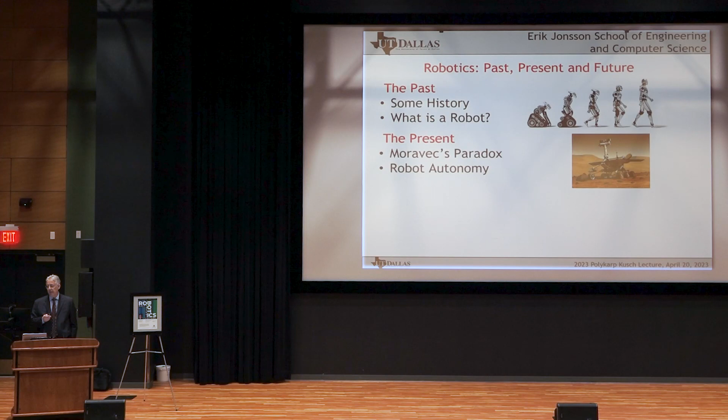And then I want to talk about something that's called Moravec's paradox. And if there's one takeaway from this talk, it should be that whenever you hear about artificial intelligence and robotics doing our day-to-day tasks, think in terms of what Moravec's paradox has to say about that, and we'll get to that. Then I'll talk about autonomy, the holy grail of robotics. What does it mean for a robot to be autonomous? I'll give you a few examples. And in the future, I'm going to talk about a couple of specific areas that I think are important: humanoid robots, networked robots, human-robot interaction, which is extremely important these days, and telepresence. So that's kind of where we're headed.

Now, the history of robotics, of course, goes back even pre-classical, before even the Egyptians, the Greeks. People were interested in building artificial humans, animals, and so on. We don't have time to talk about any of that, but there is a long history of mechanical animals, dolls, and what were called at that time automata. Prior to the 20th century, things like a mechanical horse, steam-powered mechanical man, lots of dolls, and so on.

I'm not going to go farther back than that, but there's an interesting example of the golem, which in Jewish folklore is an animated humanoid. Certain rabbis had the power to create golems out of clay and bring them to life, and the golem is actually mentioned in the book of Psalms in the Bible. The most famous golem legend is probably that of Rabbi Loew of Prague, who created a golem in the 16th century to protect the Jews of Prague. In some accounts, the golem eventually went on a murderous rampage, killing the Jews. So it seems that golems, once created, are difficult to control.

That influence of the golem is actually seen in many stories, like The Sorcerer's Apprentice, Frankenstein, and a number of others. It speaks to a somewhat distrust in Western culture of science in general, and the idea that you create something, like in The Sorcerer's Apprentice, and something goes wrong.

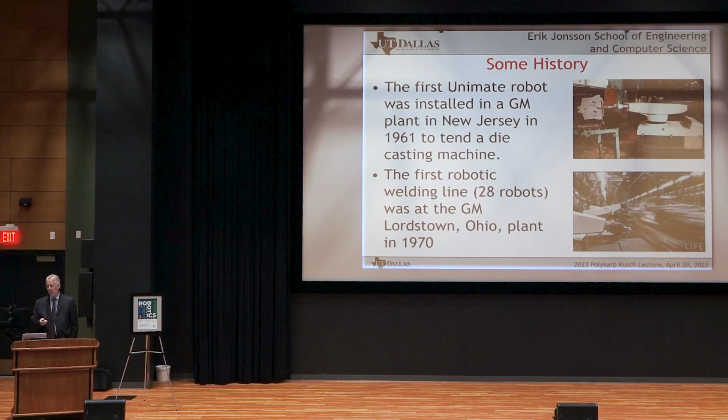Okay, that's all the time we have for history.

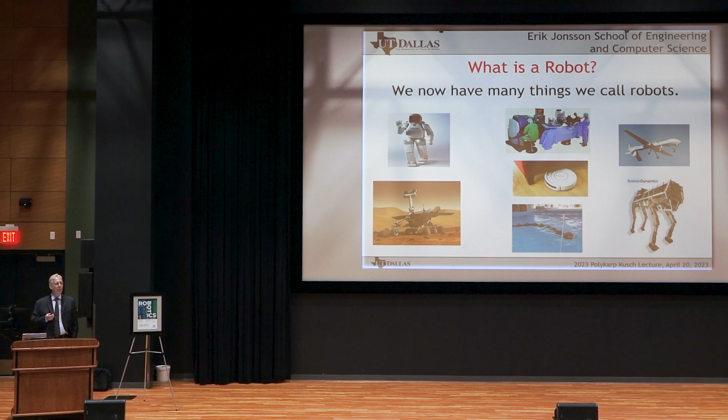We now have many things besides manipulator arms that we call robots. So if I would ask you to define a robot, how would you define it? We have many things we call robots: humanoids, robot surgery systems, drones, vacuum cleaners, Mars rovers, and so on. In fact, the term robot has become quite overused.

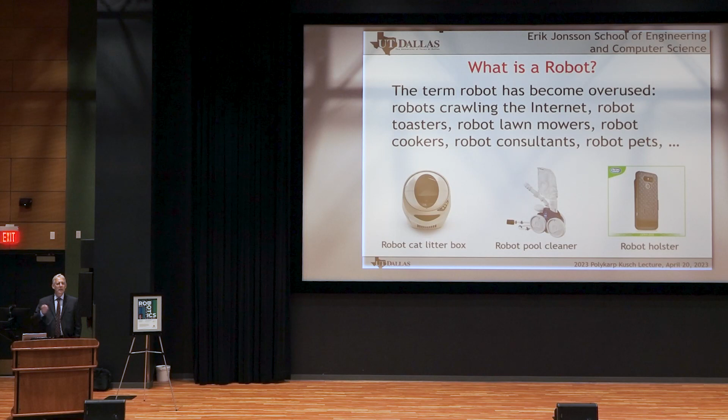How many of you go to a website and have to check a box, 'I am not a robot,' before you can proceed? We have robots crawling the internet, robot toasters, robot lawnmowers. You can go to Amazon and find a robot cat litter box, or a robot holster, which is something you clip to your belt to hold your iPhone. So the term has become somewhat meaningless. Companies figured out that instead of selling a crock pot, if they call it a robot crock pot, they can increase their market share.

But if you go to the robotics research community, there's a popular definition that a robot is a machine that transforms sensing into action. Here we have the environment; the robot has some sensors to collect data and sense the environment, some computation to analyze the data, and it computes commands to give to the actuators to act back on the environment to do some work.

In the field of control, if you ask what is a control system, this idea of sensing into action is actually the central concept in feedback control. So it's hard to distinguish these two definitions of a robot: a machine transforming sensing into action, and a feedback control system, which also transforms sensing into action. For me, without feedback control, there's no robot. And action essentially means manipulation or locomotion.

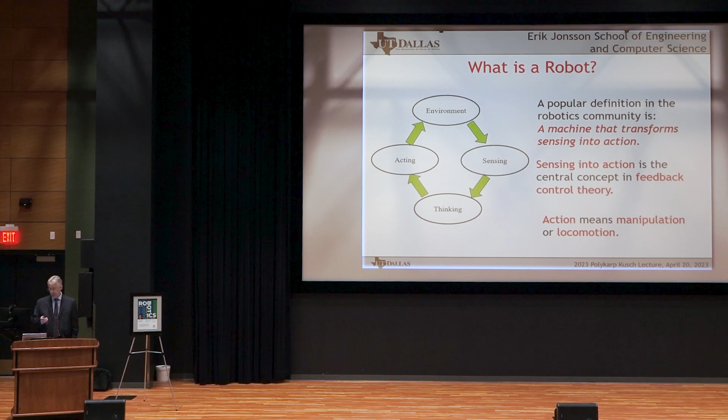Manipulating objects, moving around from place to place, and so on. My definition of a robot, modified a little bit, is a machine that transforms sensing into action through feedback control, capable of manipulation or locomotion. We'll see some examples of these two.

Manipulation is really the harder of the two tasks. Because for locomotion, we have wheeled vehicles, and there have been great strides made—no pun intended—in walking robots with bipeds, quadrupeds, and so on. We still have a long way to go to build robots that are capable of really good manipulation.

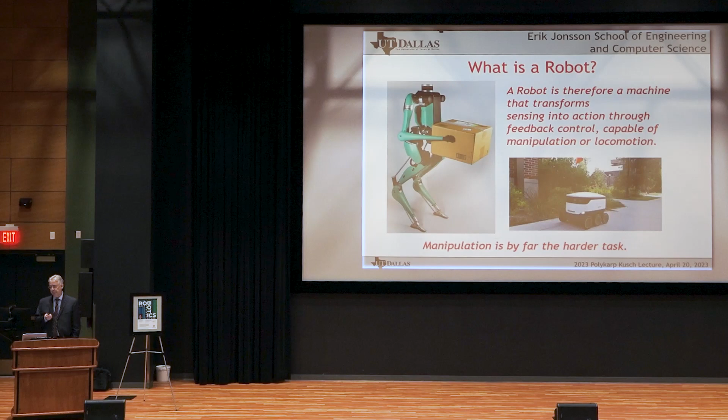Well, that leads into what's called Moravec's paradox. The way it's stated is that low-level sensory motor control tasks require enormously more computational resources than high-level reasoning. Well, what does that mean?

Since we're at UTD, the best example I can give you of that is robot chess. We have chess programs that can play at the grandmaster level, but a small child can manipulate the pieces on the board better than the best robot. So why is that?

Well, one explanation is that sensory motor control has had millions of years of evolution to develop. High-level cognitive skills are much more recent from an evolutionary standpoint. If you encounter a lion on the savannah, you'd rather be a good runner than a good chess player, right?

So this has a lot of implications in terms of capability of robots. The oldest human skills are largely unconscious, and so they appear to us to be effortless. Skills that appear effortless to us are actually among the most difficult to reverse engineer. Things like walking, running, grasping, catching, and throwing are actually quite difficult to build a robot to do.

So the easy way to state this is: things that appear easy for us are actually hard for robots. And conversely, things we think are difficult, like figuring out chess strategy, are actually easier for artificial intelligence programs to accomplish.

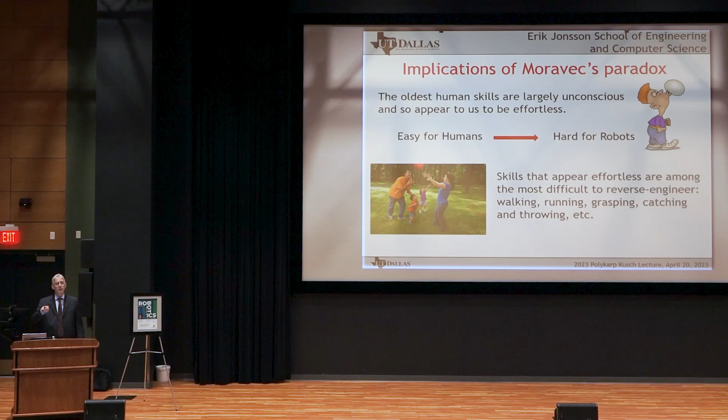Another implication of that is if you think of jobs that are going to be automated—jobs that are easy to automate, like bank tellers, paralegals, customer service representatives, editors, and proofreaders—these are jobs that do not involve significant manipulation or locomotion.

Jobs that are difficult to automate—landscapers, chefs, housekeepers, auto mechanics, and so on—are jobs that involve significant manipulation or locomotion, and they're actually very difficult to automate, like the job of a landscaper or a housekeeper.

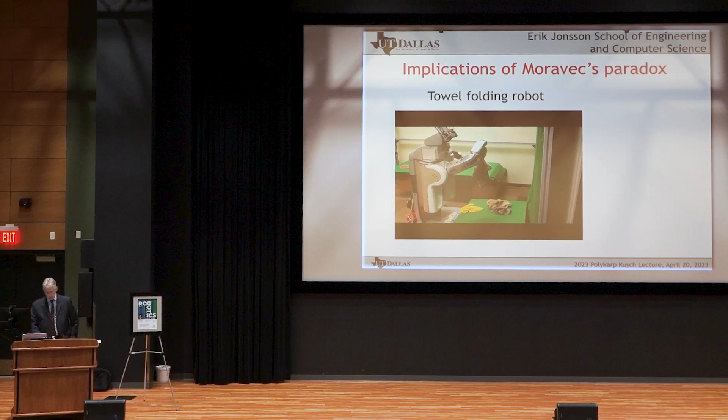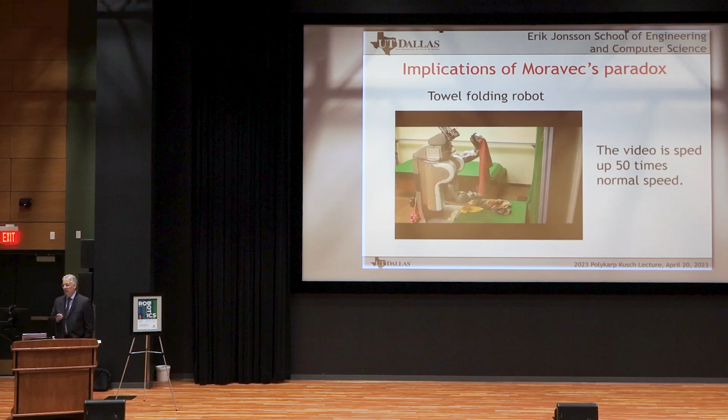Now I have to tell you, this video is sped up 50 times normal speed. So would you rather, if you're a hotel, have a minimum wage housekeeper, or a $200,000 robot that takes 20 minutes to fold a towel? This is Moravec's paradox—it's very difficult to get robots to do these sorts of manipulation tasks.

Okay, so we hear a lot about robot autonomy. We have autonomous vehicles, autonomous drones. What do we mean by robot autonomy? Well, autonomy refers to action without human control or intervention.

We think of autonomous robots as somehow being intelligent, but are they really intelligent? What does it really mean? What is the current state of the art in autonomy compared to something we might classify as real intelligence?

David Mindell, if you read his work, says autonomy connotes a broader sense of self-determination than simple feedback loops, and incorporates ideas from artificial intelligence and other disciplines. The point is that what we call autonomous robots today are not really autonomous in the sense of being artificially intelligent. The current level of autonomy in robotics does not represent an ability to reason or make decisions beyond what the control system designers intended.

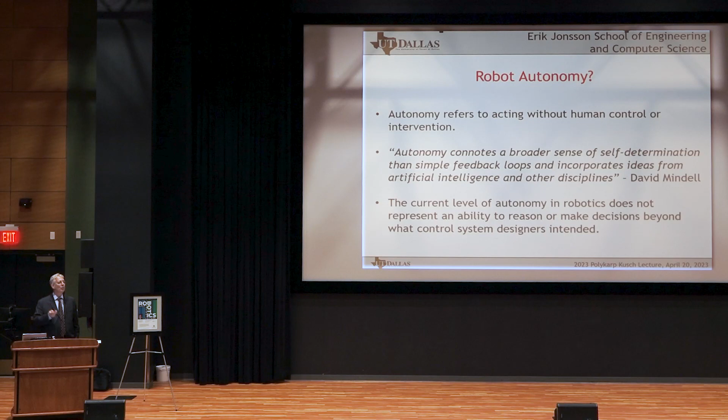So let me give you an example of that. This is from our lab here at UTD, some things my students did. Here we have a network of 4 ground robots and a drone. The basic idea is the robots are commanded to follow a certain path, avoid collision with each other, and they have sensing capability—they know if they're getting close to another robot not to collide.

The drone is basically given a task: just follow the configuration of robots, follow that team of robots around. Now this is completely autonomous in the sense that once it starts, there's no human interaction.

The robots are doing what they're programmed to do, following trajectories, avoiding collisions. The drone is following the pack, keeping the formation in view. This is old work, and we have a lot more going on at UTD that has extended this quite a lot. People in our engineering school, Tyler Summers, Justin Ruths, Justin Koeln, and others have extended these ideas.

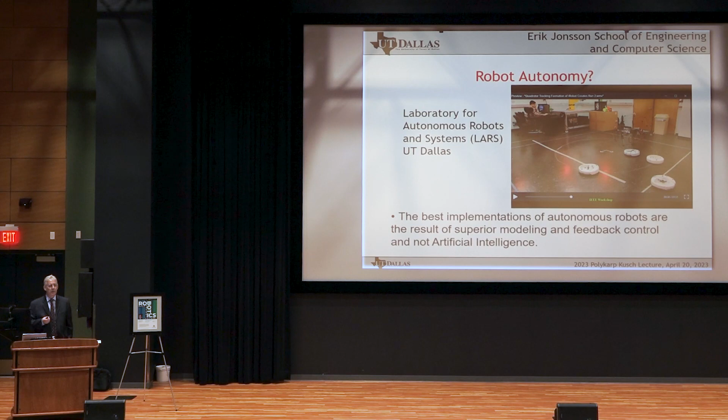But this is essentially the state of the art in autonomous robots, including autonomous driving. It does not represent true intelligence. They're doing what the programmer tells them to do, without human intervention. So the best implementations of autonomous robots are really the result of superior modeling and feedback control, not artificial intelligence.

So my claim is that artificial intelligence is really not going to produce intelligent robots. What artificial intelligence is going to do is improve the performance of our autonomous systems.

You see this little food delivery robot on campus all the time, right? I've been doing this for 45 years, and I still stop and watch these. These guys still make me smile. You can't help it. They stop at the corner. If they see you get close to a pedestrian, they stop and wait, and it's a lot of fun just to watch them. But are they intelligent?

This is a particular application well suited for this type of robot because there's a well-structured task. They move from point A to point B. They have a well-structured environment, a map of the campus. They know where all the sidewalks are, the roads are. There's no uncertainty there. They can sense people, obstacles, cars, and so on. There's a simple control. The task does not involve manipulation. Locomotion is simple because the wheels are easier to control than legs.

So artificial intelligence will make this better, better able to recognize people. For example, maybe there's a bicycle, and the perception system might say that bicycle doesn't have a rider on it, so I don't have to worry about that, I can just keep going. But if the other bike has a rider, I better stop and wait for that. So there are a lot of ways AI can improve performance, but the basic structure, which translates to autonomous vehicles, autonomous drones, and so on, is a well-structured task that's good for robots to do.

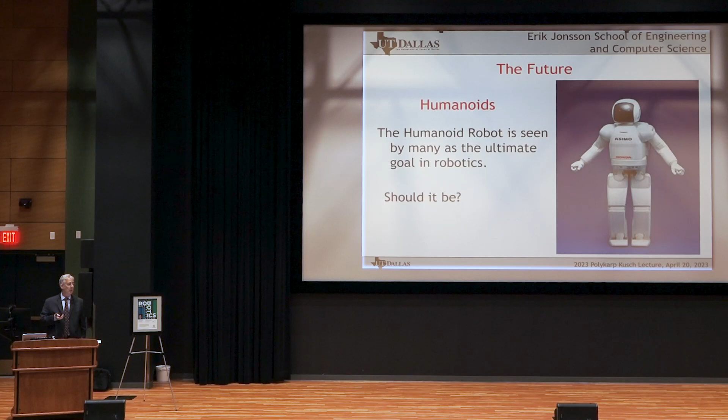In other words, is the future going to be Rosie or Roomba? Well, my money's on the Roomba.

One of the reasons is something you can look up called the uncanny valley. The concept suggests that humanoids that look too much like us give us a kind of uncanny feeling of uneasiness or even revulsion. So the valley denotes a dip in the human observer's affinity. We have these cute little robots here, we like them. But if it gets too much to looking like humans, they become creepy instead of cute. That's been well recognized as what's called the uncanny valley.

There's an interesting story about the Roomba that I heard secondhand, but I believe it's true. Another reason we like robots is that we anthropomorphize them, so you don't need to be Rosie for people to have an affinity for their robot. There was a family that had a Roomba vacuum cleaning robot, and it broke, so they sent it to the company for repair. The company said, well, we cannot repair this, we're going to send you a new one. And they said, we don't want a new one, we want Alice back.

So the idea of a $1 million humanoid robot with limited capability is perhaps not the ultimate goal. A humanoid robot would go to Subway, make your sandwich, put it in a bag, and deliver it to you. Well, we're a long ways from doing that. We have food delivery robots in a well-structured environment that can do that, but somebody else has to actually manipulate the meat and cheese and mayo to make the sandwich.

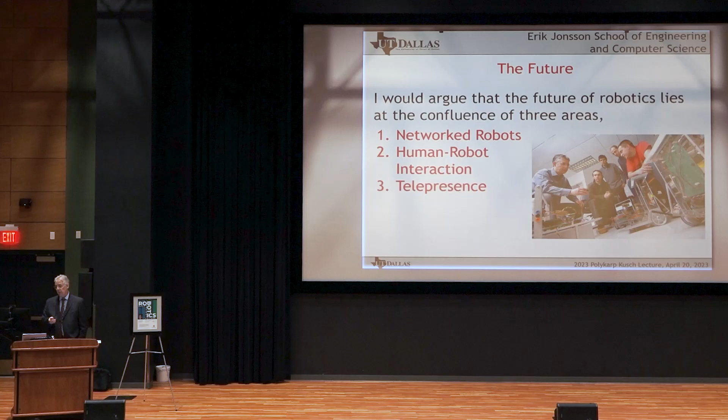So humanoids have their place in things like entertainment, but I'm going to argue that the future of robotics really lies in the confluence of three areas: networked robots, human-robot interaction, which is extremely important, and telepresence. I'll discuss each of these in turn, maybe give you a couple examples.

So why are humans successful? Well, we're successful because we work together. No one is an island. We work together, we form teams, we collaborate. By networked robots, we mean a group of independent robots that can function as a single coordinated entity through communication and cooperation. So rather than one expensive monolithic robot, you have multiple inexpensive robots that get their functionality by collaboration, working together.

Applications include things like surveillance, environmental modeling, health monitoring, cooperative manipulation, vehicle formations. Agricultural robots is a big application because, again, it's in a well-structured environment.

Here's a little example, a very simple experiment that we did with Tokyo Institute of Technology. These are 4 robots, and each robot can basically sense robots within some distance away from it. The motivation is, think of a school of fish—each fish can sense only maybe its nearest neighbors. How does the collective behavior of a school emerge from local information when each fish has only limited sensing? So each robot can sense any robot that comes within a certain radius of it.

And the goal here is just, we told the robots, point in the same direction. Find out what your neighbor's doing and point in that direction. The emergent behavior is they should all eventually point in the same direction. We start this.

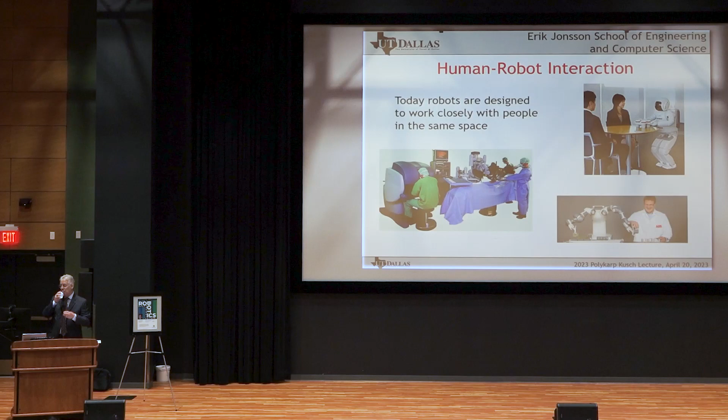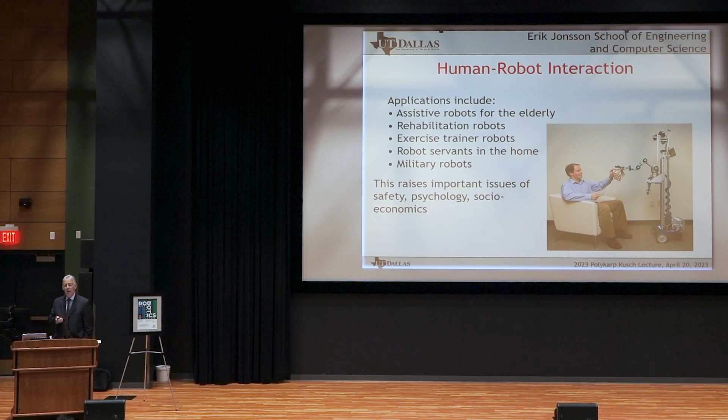Applications are assistive robots, hospital robots, rehabilitation, exercise trainers, household robots, and so on. And this raises important issues of safety, psychology, socioeconomics. These are problems engineers can't solve alone. We need to get social scientists involved, psychologists involved, and so on. Because it's not the robots themselves or the humans themselves, it's the interaction that leads to new problems, new areas of research that need to be pursued.

Dean Adams actually mentioned the air hockey robot. I want to put this up because this was something that we did in the 1990s. Human-robot interaction was not even a term I knew—I didn't realize that we were doing human-robot interaction at the time. But the National Science Foundation had a new program they called Intelligent Control. Nobody knew what intelligent control meant, and I think we still don't know what intelligent control means. But we decided to put together a project to study the integration of control theory with real-time computer vision and machine learning. And we called that intelligent control.

Now you have to remember that everything I'm talking about, everything you see today, and all the advances in AI, robotics, and so on, it's really a consequence of Moore's law, that the power of computers has been increasing every 18 months to 2 years for several decades. So the power of computers have reached the point where we can analyze huge data, take 1 million training samples and analyze them very quickly.

When we started this project in the 90s, computer vision was a very hard problem because it was very slow. And now you have a webcam on a drone, and it can do control in real time. We couldn't do that. So in order to try to test our theories, we came up with this idea: why don't we build an air hockey robot?

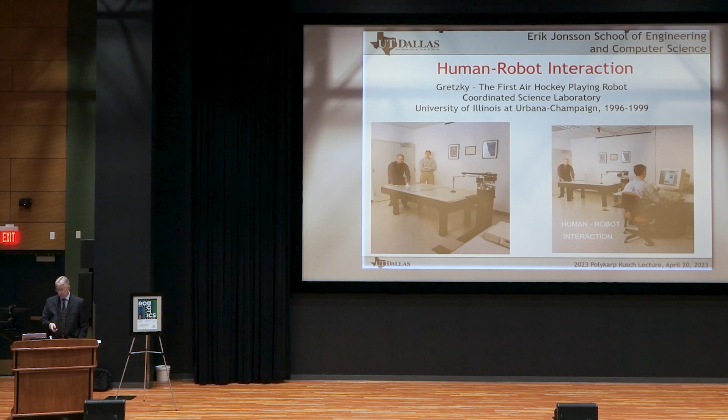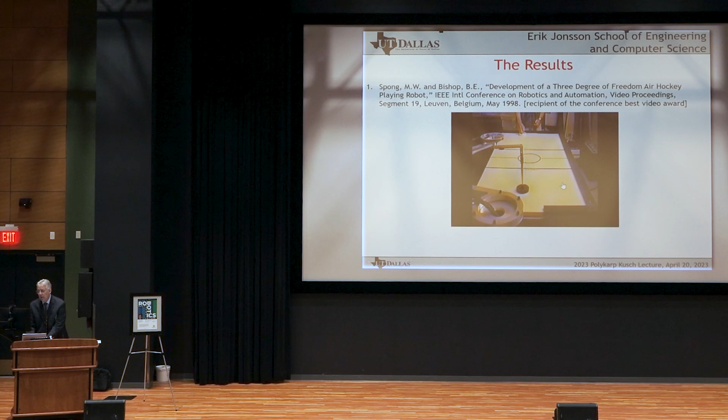My student here in the purple is Brad Bishop. That was his PhD thesis. He's now the department chair of the Systems Engineering Department at the U.S. Naval Academy, teaching robotics to midshipmen, and he did a great job on this. Here's a very short video showing some performance. He was inspired to a great extent by the work of Buehler and Koditschek, who have developed a 3-degree of freedom juggling robot.

While juggling can be likened to running over level ground, in the sense that both involve the establishment of stable periodic motion, air hockey can be likened to running over highly irregular and uncertain terrain where frequent gait changes are necessary and real-time vision must be used to generate suitable foot placement. Thus, robot locomotion forms an important long-term goal of our research.

Something that I didn't have time to talk about is a kind of duality between manipulation and locomotion. We kind of thought that when you're walking, you're interacting, manipulating the ground. This air hockey controlling through impacts is kind of like running over irregular terrain where you have to use your vision for foot placement and so on.

What was interesting is we actually programmed in — again, there's nothing artificially intelligent, it's merely a control system that takes the sensory data and has some algorithm to figure out where to move the paddle — what we called a confidence measure. Because the puck vision was difficult and the puck may be moving fast, we devised a confidence measure based on the reliability of our sensory data: if the confidence is below a certain level, play defense; if your confidence is higher, play offense. And when you play with this robot, you couldn't tell what it was going to do, whether it was going to play defense or offense. So in that sense, the behavior that came out of this was hard to predict.

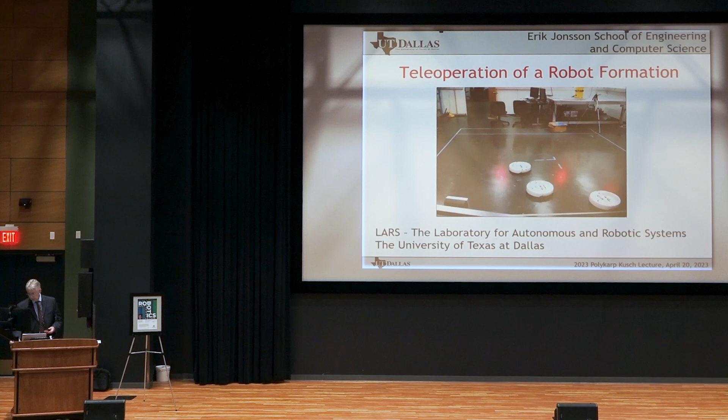So this is, again, an old slide that I put together for another talk. I think it's very relevant today because we had the experience during COVID of having our conferences, meetings, and classes via Zoom. And I don't think anybody really liked it, right? Students didn't like it, we don't like it. I attended very few conferences that were via Zoom—I just didn't like it.

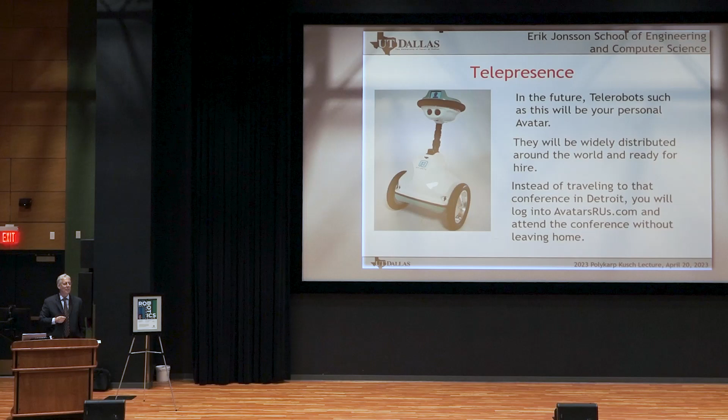So here's another idea: maybe you have a personal avatar. Instead of having a Zoom conference, you're sitting in your office, but your avatar goes to the conference, and everybody has their avatar there. You could have a company like 'avatars are us'—you swipe your credit card, the avatar is at the conference center and goes to the meeting room. This is obviously a disruptive technology impacting transportation, hotels, restaurants, and so on, but it'll increase productivity. Maybe there's only 1 or 2 talks you want to hear, so you can hear those in the morning and still teach your class in the afternoon.

Controlling one of these telepresence robots is like using a video chat program with a few extra controls to steer yourself around. You can do most of the things that you would do in person, for example, stopping to talk to people you meet.

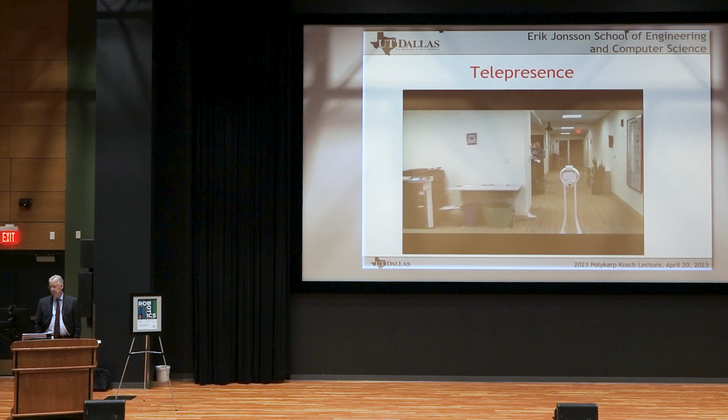Or having a conversation as you walk down a corridor alongside someone—because you can get a feel for the space around you and watch people's body language, those conversations are much like those you would have face to face. I got much more out of our morning meeting as a robot than I would dialing in on the phone as usual, and the people there could talk to the machine as if it was me. Academic research shows that machines that try to act in place of people often encourage high expectations that they cannot always meet. Ultimately, a telepresence robot would always be slightly less slick and less capable than you would be in the same situation. If these robots become more common in the workplace, we'll have to learn a new set of social skills reserved for our colleagues that are machines rather than people.

Okay, so quick summary here. Robotics is all about productivity. Automation is all about productivity. But I think that rather than replacing humans, the next advance is going to be robots working with humans to augment human productivity, not replace humans. Humans and robots working together will be able to accomplish tasks that neither can accomplish alone.

Some jobs will go away. Automation always eliminates some jobs but creates others, which is not to say it's not going to be disruptive. I think we're changing so rapidly that we're going to have a huge disruptive phase, and how that shakes out, perhaps, is yet to be decided. But definitely new jobs will be created if we use it right.

We can take advantage of AI and robotics to augment human performance rather than replace humans. So artificial intelligence, as I said, doesn't create intelligent robots, but improves their performance in well-structured tasks, such as autonomous driving, delivery, agricultural, and forest robots.